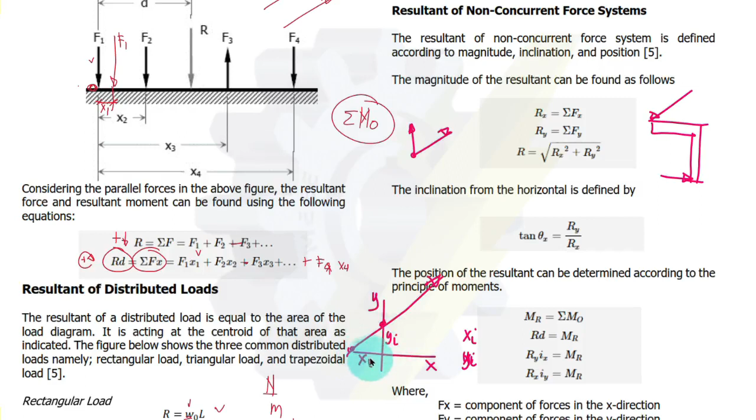Problem number 236, page 34, from the book of Ferdinand Singer. A parallel force system acts on the lever - determine the magnitude and position of the resultant. So what's required is the resultant and its position. In our figure earlier, we used D.

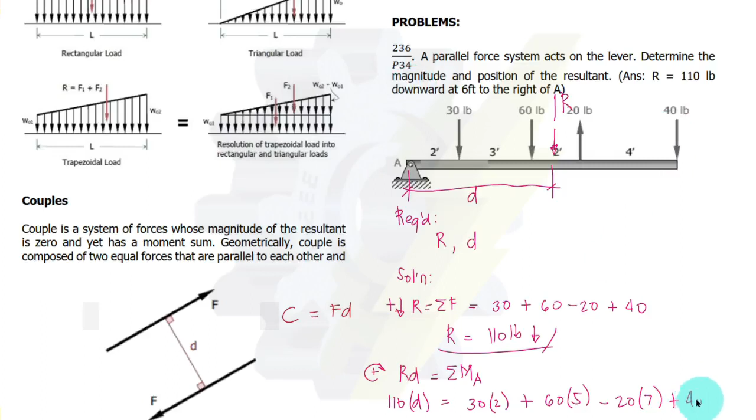Okay, so then last, 40 pounds yung force. Clockwise yung moment, so plus 40 multiplied by 11. Yung mga units, kung titignan natin, ito ay naka-pounds, ito ay pounds din, ito ay feet. Then ito ay pounds, so yung pounds makakancel na. Ang matitirang unit for D ay feet. So that is equal to 6 feet. 6 feet tong D natin, ibig sabihin 6 feet to the right of A.

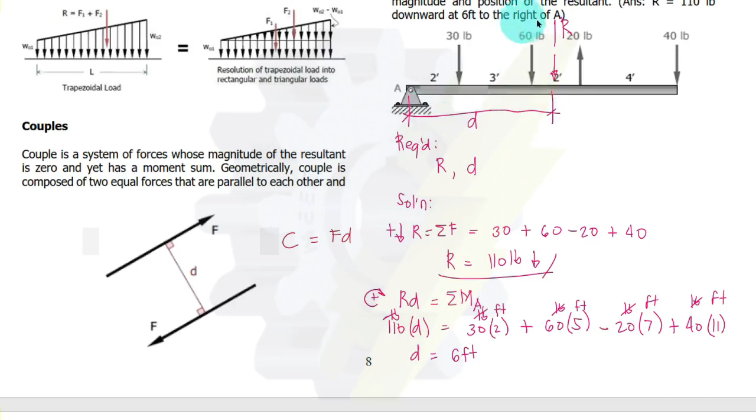Next problem. The beam AB supports a load which varies in intensity of 50 pounds per foot to 200 pounds per foot. Calculate the magnitude and position of the resultant load. Ito ay under dun sa trapezoidal load. So required is R and its position again. Hindi natin ilagay D. Assume ito yung ating R, ito yung kanyang location. Yung resultant, yung R, is simply equal to 1/2 yung dalawang intensity. Let us say W1 na lang to, ito yung ating W2. So 50 plus 200 multiplied by 12, naka-feet, then pounds per foot. Itong dalawa, cancel yan, so pounds yung matitira.

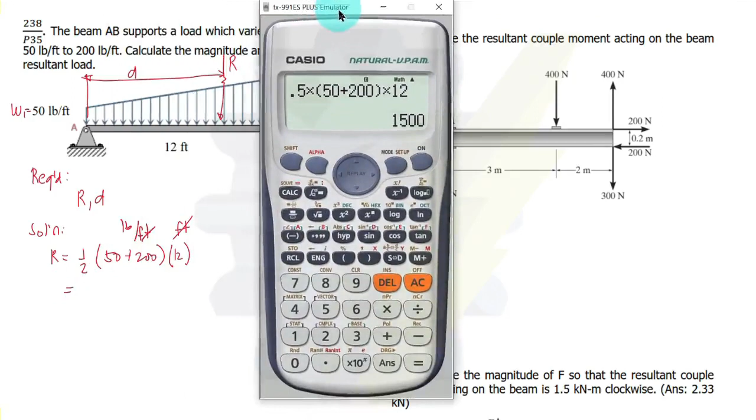Ang sagot ay 1,500 pounds. For the position, we need to consider yung dalawang forces dito sa triangular tsaka dun sa rectangular. Dito sa rectangular o triangular, say this is F2 na lang, then ito ay F1, yung isa. Alam natin, ito ay kalahati lang ng 12. Yung F1, yun yung force na re-represent ng rectangular load, kalahati lang ng 12. So L dyan ay 12, so ito ay L over 2, that is 12 over 2, that is 6. Then yung isa, yung position niya mula dun sa A, yan ay 2/3. Itong solution, ayusin nyo na lang. 2/3 ng 12, so this is equal to 8.

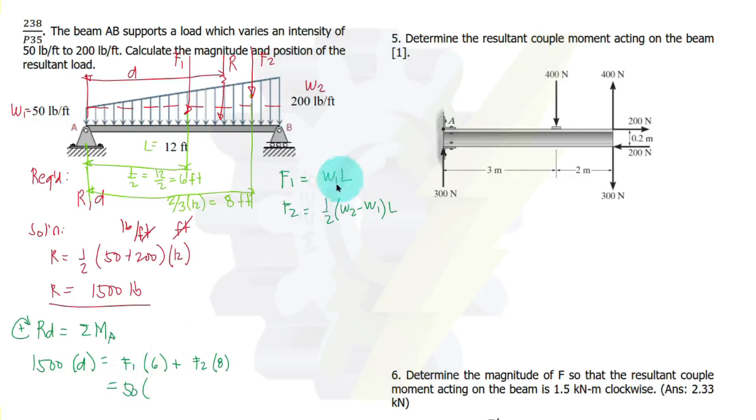Pwede natin i-apply yung RD is equal to summation of moment. Sa point A na lang tayo. RD, yung R ay 1,500. Assuming ulit, clockwise ay positive. Multiplied by D, so that is equal to summation of moment. Dalawa lang yung forces dito na involved. Yung F1 dyan ay equal to W1 multiplied by yung length. Yung F2 ay equal to 1/2 W2 minus W1 times L. Yun, yung F1 multiplied by 6 plus yung F2 multiplied by 8. Substituting F1, yung W1 alam natin 50, 50 multiplied by yung L, so 12, multiplied by 6, plus F2, ito yan, so 1/2, yung W2, 200 minus W1, 50, then multiplied by L, so 12, then multiplied by 8. So 1,500 D, D here is equal to 7.2 feet.

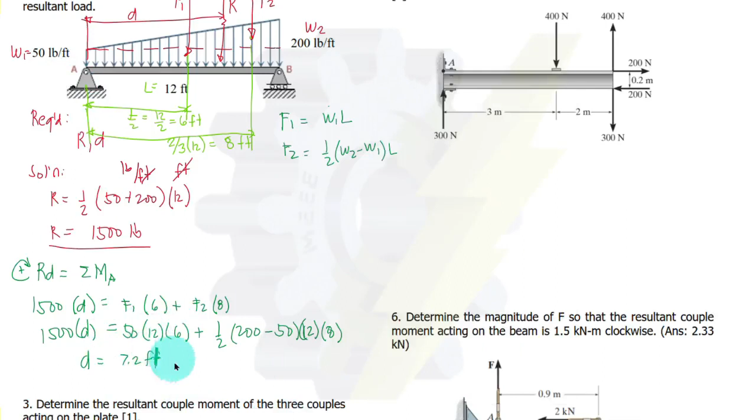So that is from A, or to the right of A. Kung gusto nyo i-solve yung distance niya hanggang sa point B, so 12 minus 7.2, yun ay equal sa 4.8. So 4.8 hanggang dito sa B.

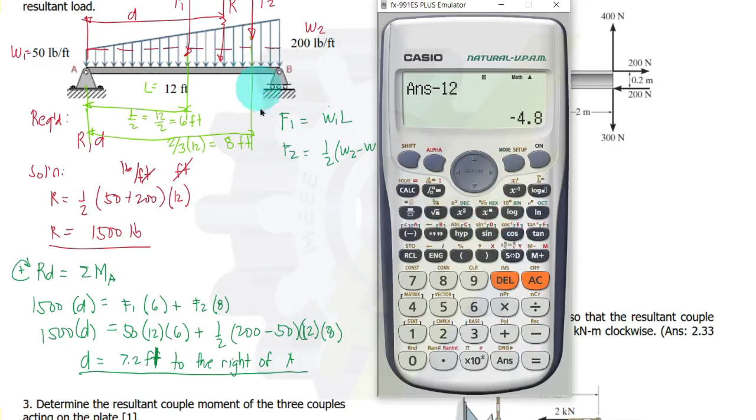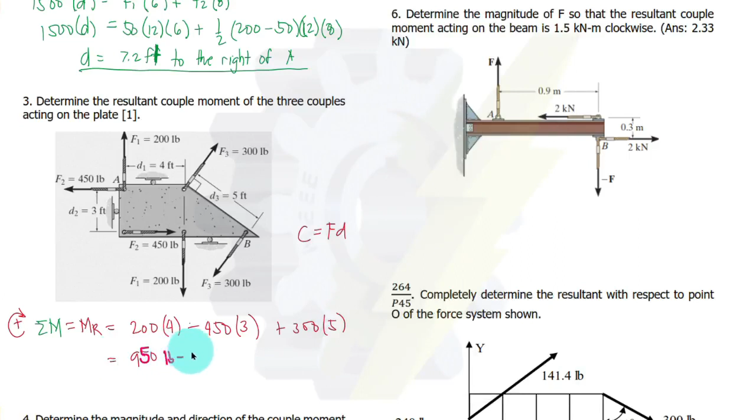Next problem. Determine the resultant couple moment of the three couples acting on the plate. Resultant couple moment, pareho lang yan sa summation of moment, we can denote that as MR na lang. So couple, alam natin, FD lang. Unahin natin yung F1, 200 multiplied by yung distance between the two forces, 4. Ang assumption natin dito, assume na lang natin clockwise ay positive. Ito clockwise, so positive siya. Then itong 450, magpo-produce to ng counterclockwise, so negative 450 multiplied by 3. Then yung F3, ito yung F3 na dalawa, clockwise naman siya, so 300 multiplied by 5. Ang sagot ay 950 pounds-foot, positive yung na-solve natin, so therefore ito ay clockwise.

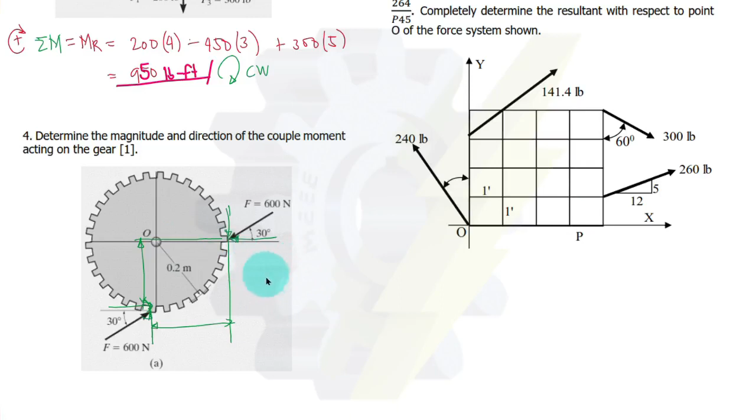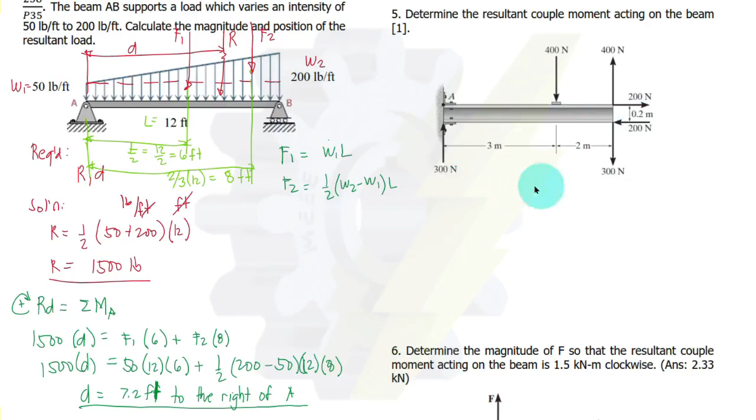Yung number 4, isolve nyo na lang yung mga components nila, yung vertical saka yung horizontal. Ganoon din dito, yung vertical saka yung horizontal. Tapos isolve nyo yung distance between the parallel forces or yung components, ito tsaka yung isa, ito yung isang distance. Pag na-solve nyo yan, kukunin nyo lang yung summation ng couple or summation of moment. Kayo na bahala dito. Itong number 5 ay similar lang dun sa number 3 kanina, ito yung mga forces na involved, 400, 200, and 300. Consider nyo lang ulit yung mga positive tsaka negative.

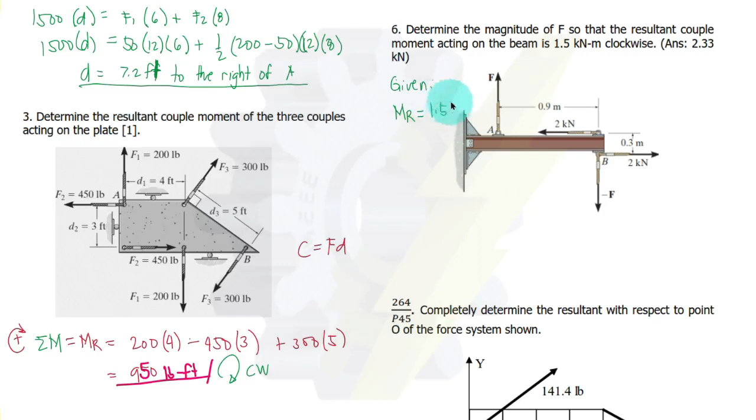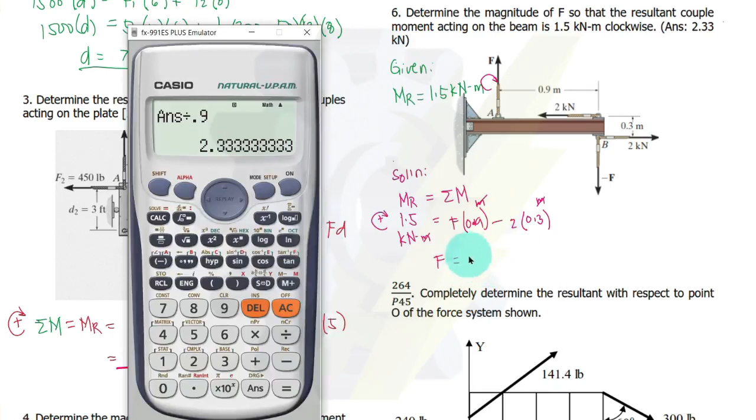Para sa number 6, ang unknown dito ay force naman, ang given ay yung resultant couple na 1.5 kilonewton meter. Solution: MR, o yung summation of moment, ilagay na lang natin dito. Ito yung moment ng resultant o resultant moment, so ito ay 1.5 kilonewton meter. Equal to, so yung F, kung mapapansin natin, clockwise lang yan. F multiplied by 0.9. Then next yung 2, ito ay counter naman. Ang assumption natin dito ay clockwise yung positive, kaya itong 2 kilonewton na force magpo-produce to ng counterclockwise moment o couple. So that is negative 2 multiplied by 0.3. Kilonewton meter yung unit natin dito, ito ay naka-meter, so makakancel yung meter, therefore ang unit ng F ay kilonewton. So that is equal to 2.33 kilonewton.

Okay, so next problem. Ang required dito ay yung resultant tsaka yung kanyang position, kasi nakalagay completely determined.

So kasama na rin yung kanyang direction. So required is R. Ang formula para dyan, alam natin. So yan yung mga formula.

Solution. Let us solve first for Rx, lahat ng component ng mga forces along X axis. Assuming to the right ay positive. Unahin natin yung 240 pounds, yung kanyang X component ay ito, 30 degrees.

Paki-add na lang dun sa handouts nyo or sa lecture ninyo. Then the X component, pwedeng cosine 60 or sine of 30 yung gagamitin. So 240 sine of 30 degrees. To the left, so therefore negative.

Next force, yung 141.4. Ang X component niya ay ito. Wala tayong gagamiting angle, pero merong given na dimension tong mga boxes. 1 by 1, ibig sabihin ito ay square root of 2 or 45 yung angle. Pwede nyo gamitin yung angle or yung slope. Ang slope nito ngayon, 1 over square root of 2. Yung X component ito, to the right, so therefore yan ay plus. 141.4 multiplied by 1 over square root of 2, or simply cosine or sine 45.

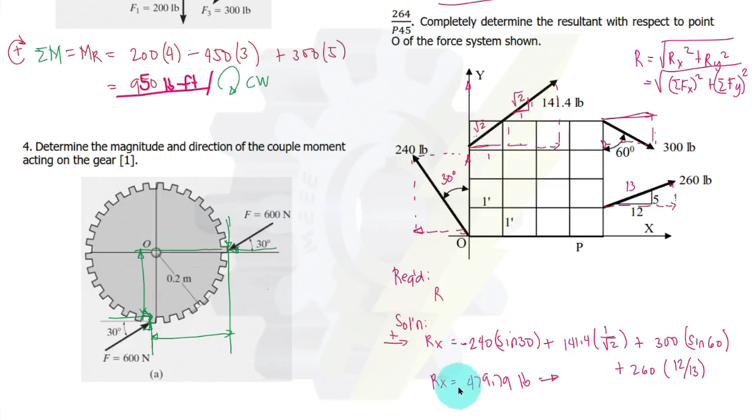Then last force, yung 260, pakanan, ito naman yung component niya. So ito ay plus 260 multiplied by 12 over 13, kasi 13 yung hypotenuse nito. Ang Rx natin dyan ay 479.79 pounds to the right, kasi positive to.

So next for Ry. Ry is equal to lahat ng components along y-axis, yung lahat ng vertical components. Ulit yung 240, up yun. Ang assumption natin dito, lahat naman ng upward forces ay positive. So 240 multiplied by cosine of 30. Then plus yung 141, pataas din yun. Then next, yung 300, downward yun, so pababa, negative. Negative 300 multiplied by cosine of 60.

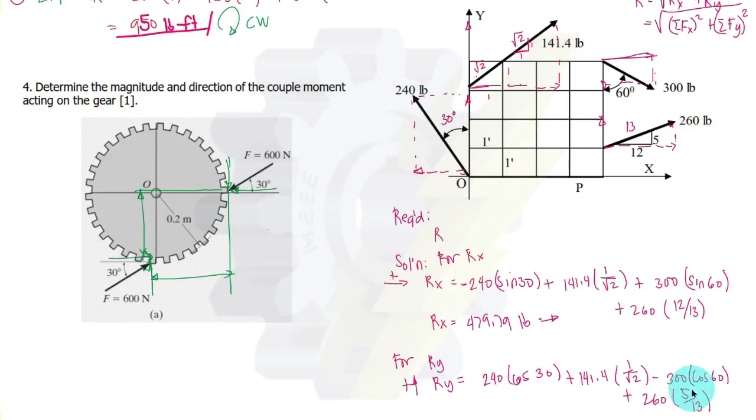Then yung 260, yung y component niya ay upward, positive. So 260 multiplied by 5 over 13. Sa solution ninyo, mas maganda pagkasyahin nyo yung buo, yung hindi napuputol gaya nito. So that is equal to 257.83 pounds, upward.

So we can now solve for the resultant. That is square root of 479.79 square plus 257.83 square. So that is equal to 544.68.

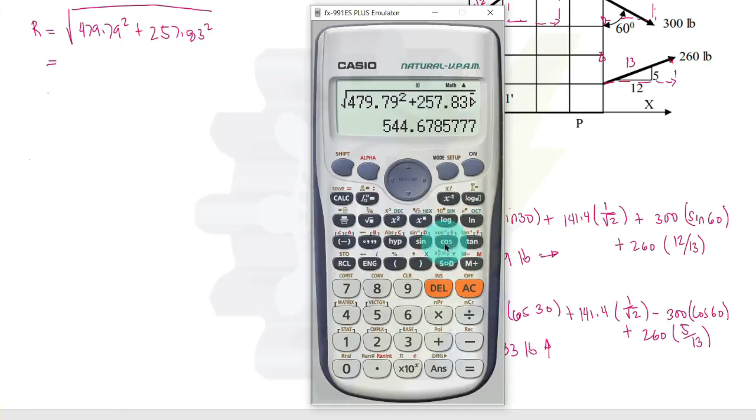Let us solve also for the angle of inclination. Although wala naka-specify, nakalagay kasi completely solve, kasama na yung angle of inclination. So that is arctangent of Ry over Rx. That is equal to 28.25 degrees. Yung position ng ating resultant, masosolve lang natin yon kung alam natin yung summation of moment.

Ngayon, ang reference point natin ay yung origin na lang, doon tayo mag-moment. Assume natin clockwise ay positive. Yung moment ng 240 ay wala, kasi nandiyan kasi yung force natin ng 240, so walang moment yun. And then yung 141.4, ang may moment lang dyan ay yung kanyang horizontal force.

So yan ay 141.4 multiplied by yung kanyang moment arm, 1, 2, 3, so 3. Clockwise yun, so positive.

Then next, yung 300 pounds, both components na ay may moment. Unahin natin yung kanyang x component. Ang tendency niyan ay mag-produce ng clockwise moment, so therefore yan ay positive. 300 multiplied by sine of 60, yan yung kanyang horizontal component or x component.

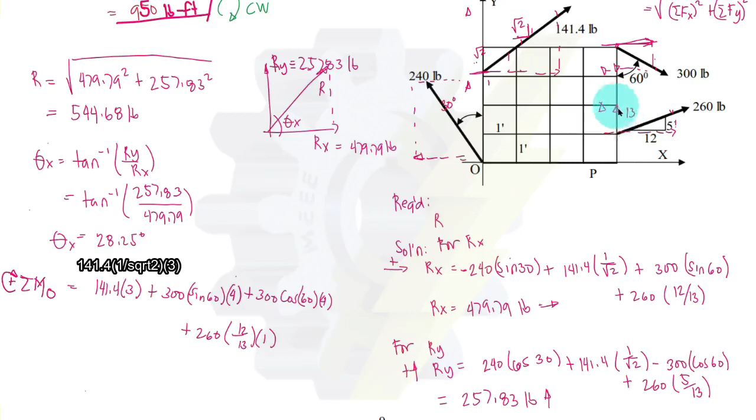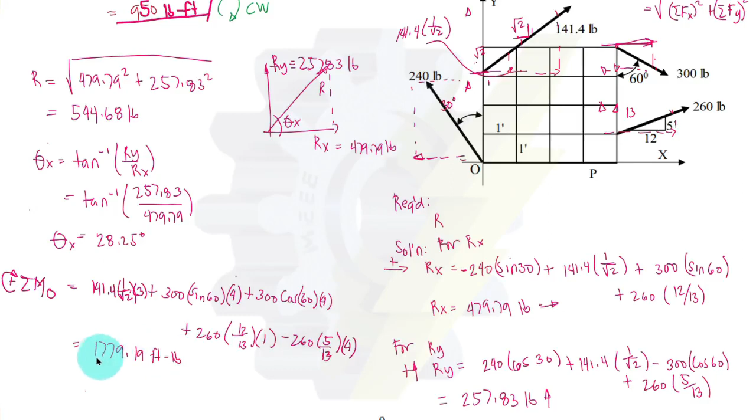Ang tendency naman niyan ay mag-produce ng counterclockwise, so minus. Yung moment arm niya ay 4. So ito ay equal to 1779.19 foot-pounds, positive, so therefore ito ay clockwise.

Ngayon kung gusto natin i-solve yung kanyang position, lagay lang natin siya dito sa taas ng origin. Kapag dito sa baba, counterclockwise. Kapag sa taas, clockwise. Yun yung essence ng pag-solve ng resultant dito, ito yung theta x.

Yung moment arm niya, pwede natin i-solve yun gamit yung R times D equal to summation of moment. Substitute nyo na lang yung R at saka yung summation of moment dito. Ang moment arm niya ay 3.27.

Ngayon, pwede na rin natin i-solve yung x sub I tsaka yung y sub I. Kung meron tayong angle na 28.25 tsaka yung D ay 3.27, pwede natin gamitin yung sine para masolve yung x sub I. Then kapag mayroon na ng x sub I, pwede natin gamitin yung tangent para masolve yung y sub I. So that's all for this video.